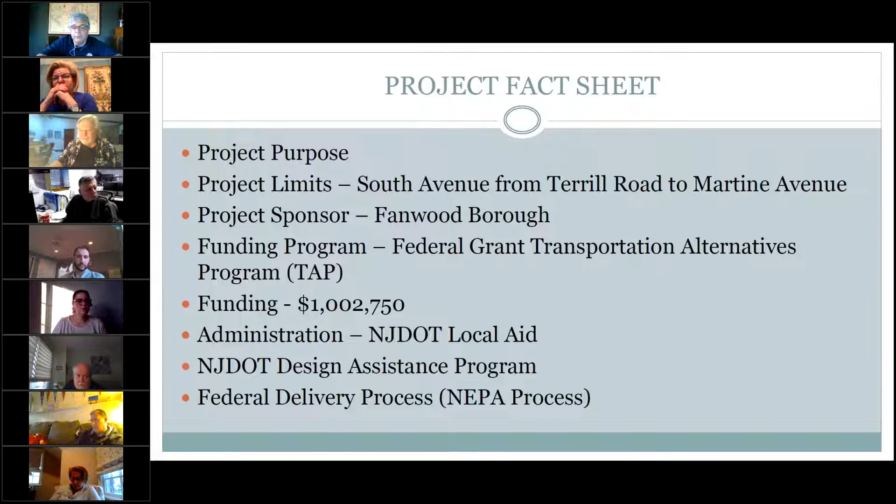Since it's a federally funded project, we have to follow what they call the NEPA process, a process developed by the federal government to ensure environmental stewardship, that the project meets the requirements, and has proper outreach to obtain input from the local community and stakeholders. So that's a little bit of an overview.

Basically, the project will have three phases of work. One is preliminary engineering, which is what we're in now. Under this phase, we'll get our preliminary layouts or design, get all our environmental clearances needed for the federal grant, and then come up with a preferred alternative to be advanced to final design. Under final design, we will get all of our right-of-way clearances, bid documents, and any other approvals needed, and have it prepared and ready for bidding for construction.

The third phase is the construction phase, at which time the project will be out to bid, a contractor will be selected, and there'll be an engineer on site during construction. So those are the three phases. As mentioned, the project goals and objectives are the installation of sidewalks and improved accessibility for pedestrians along South Avenue. The borough put in for a very competitive grant application, and was successful in receiving these federal funds.

In addition to the pedestrians, there is a streetscape component to this project. Under preliminary engineering, one of the things we want to get out there is some of the designs, themes, and visuals to aid the public in getting a sense of what the project is going to look like. So we'll be going over that as well.

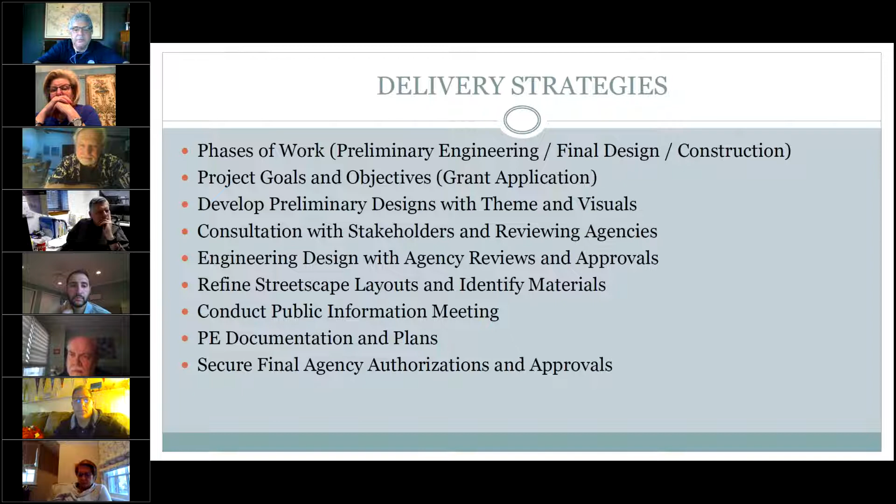At the conclusion of this preliminary engineering phase, we are going to be preparing our preliminary documentation, which are plans and estimates, as well as some reports required by the NJDOT to close out this phase of the project. Then we'll get authorization for the next phase of design, which is final design. So that's the next step, securing agency authorizations and approvals. That's kind of where we're at right now.

We're doing community and stakeholder outreach. Some of the stakeholders are boards and commissions at the borough, the DPW, police. We go out and look to procure input from all these officials, local and township officials, to obtain their input in this phase of the project, because by the time we go to final design, we really want to have a lot of those obstacles worked out. We'll also receive input from any nonprofits or interest groups.

Some of that information was provided to us, and mailers went out to the local historical groups, other historical groups, as well as the business community. Stakeholders also include government agencies - Union County has jurisdiction over Martine and Terrill Road, so they'll be involved in the review of this project, as well as the NJDOT. We've already had some discussions, as well as with private entities and the general public. There have been some discussions with property owners related to this project. We want to make sure we don't get too far down the road and have these issues creep up later.

So what have we learned? Based on our discussions with officials and stakeholders, we want the streetscaping to be low maintenance and complement the existing borough streetscaping standards currently present at the existing redevelopment area down by Martine. So we want a consistent theme, for many reasons. That's one of the things we learned.

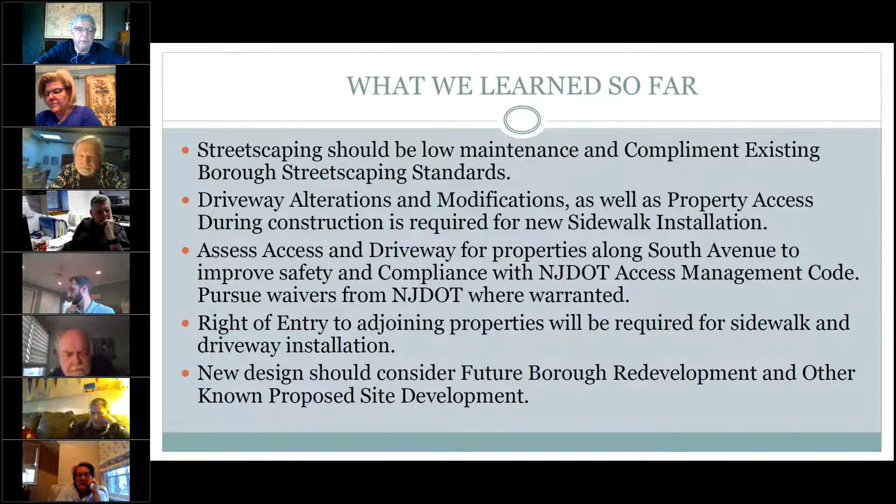So this is basically what we've learned so far. I'll walk you quickly through the improvements here. We're going to be replacing existing and constructing new sidewalk and driveway aprons basically along the extent of the project.

We're going to realign Old South Avenue and improve access onto South Avenue. Right now Old South Avenue comes in at a pretty significant skew, and I'll go through that when I walk through the plans.

Where required, we're going to restore pavement on adjoining property owners' properties fronting the driveways. Any alterations necessary to complement the sidewalk, which may include alterations to some adjacent property grass or pavement, will be included so everything matches up. That's included in the project, along with replacing existing curb where needed for some of the driveway improvements.

We'll install new traffic stripes on some of the approach roadways and may need to replace some striping there. We're not looking to touch the existing roadway pavement—we're not here to mill, pave, or do any pavement restorations to Route 28. That's beyond the scope of this project; it's strictly related to the sidewalk. If there are impacts, and it's an absolute necessity, then we will address it.

We'll also put in new ADA compliant ramps at all the intersecting side roads to make sure they meet ADA standards. Most of the ramps out there were recently replaced, and I think a majority are compliant, but those that aren't, we will be replacing.

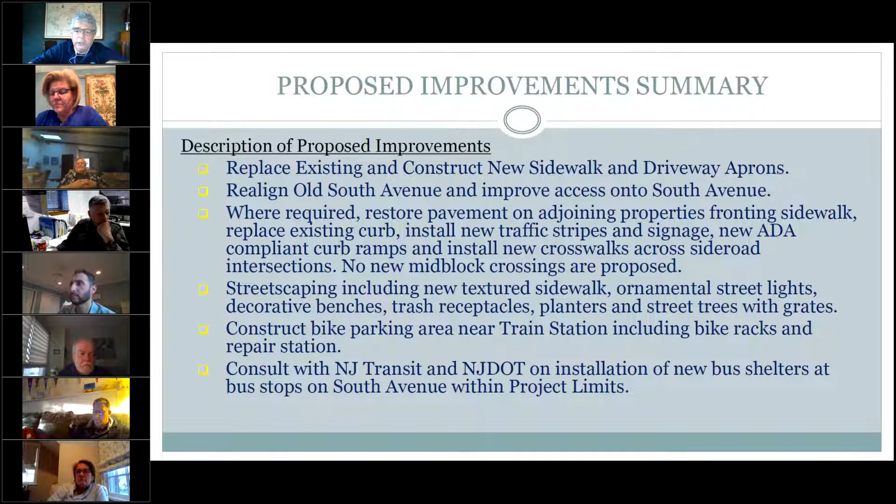We're also going to consult with NJDOT about the installation of bus shelters in certain areas and locations. That'll be coordinated as the project moves forward. We've identified the locations, but we haven't confirmed whether we're going to put shelters there yet.

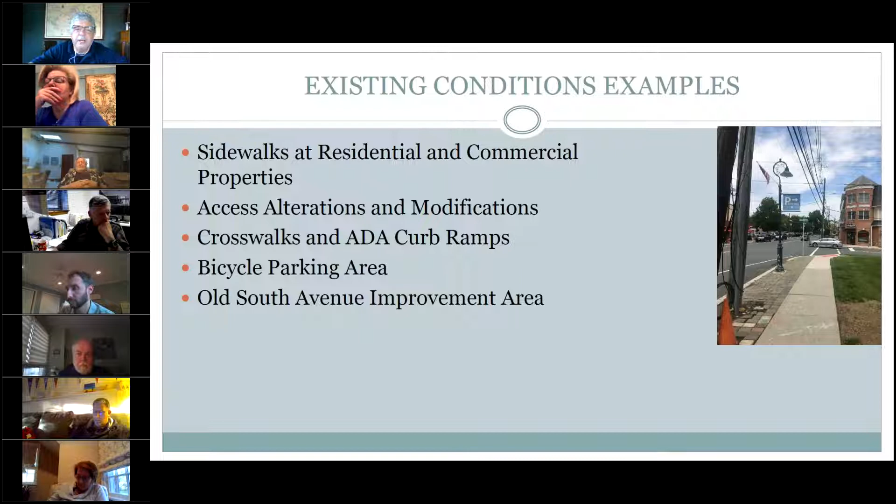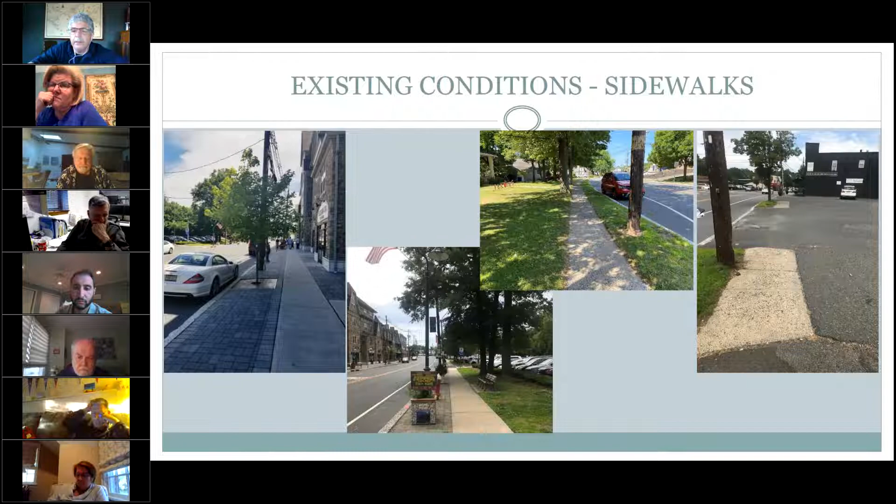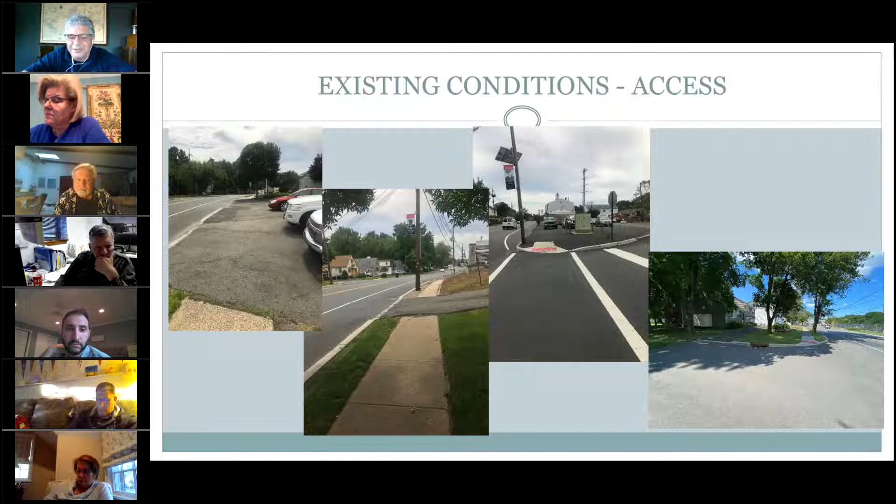This is an example on the right of an existing road opening that doesn't go anywhere. We're looking to close this off because if there's no road or street, it's confusing and not very safe. People may turn in here and there's woods right as soon as you turn into the side street, so there's no connection there, but we'll go through that in a minute.

Again, just some general photos of this disjointed sidewalk, and also on Old South Avenue, which is the photo all the way to the right. We're going to reconfigure Old South Avenue to make it safer and more direct.

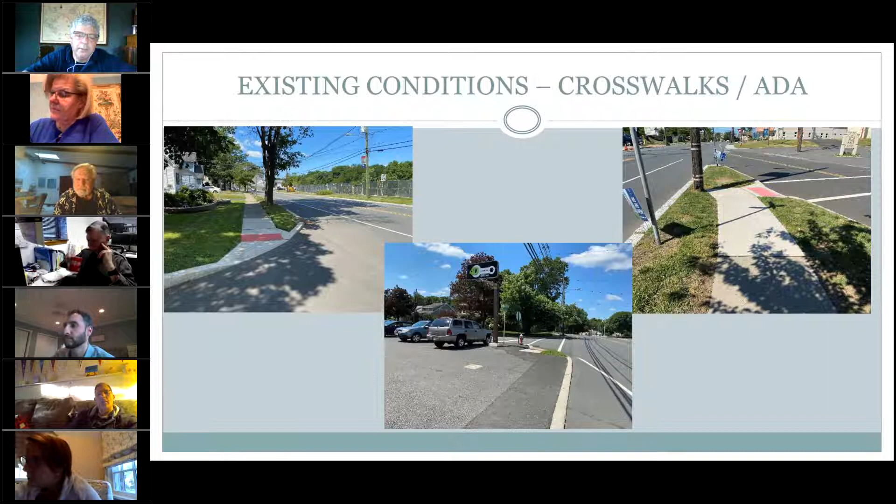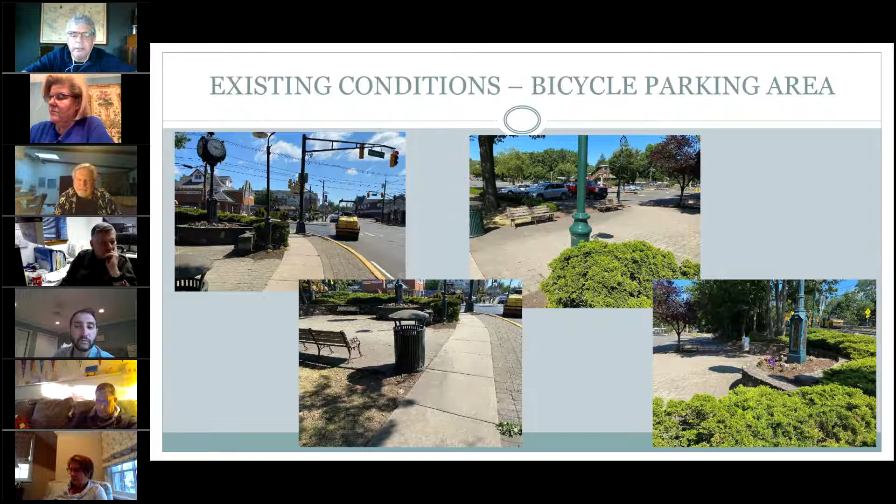It's not the safest. There's also some parking areas where the properties back out onto State Highway, and they're actually within the state's right of way. When we met with the Access Bureau, they said that's an illegal parking stall, so they've asked us to see if there's an opportunity to clean that up. So I'll get into that a little bit.

And then you have another weird situation over here all the way to the right where you have this very severe intersection into the state highway, and then you have an access, and it's just not a clean look and it's not a clean operation. So we're also going to look at cleaning that up as well. And there's a lot of conflicts, and you're trying to put pedestrians in there. It's just not a safe condition.

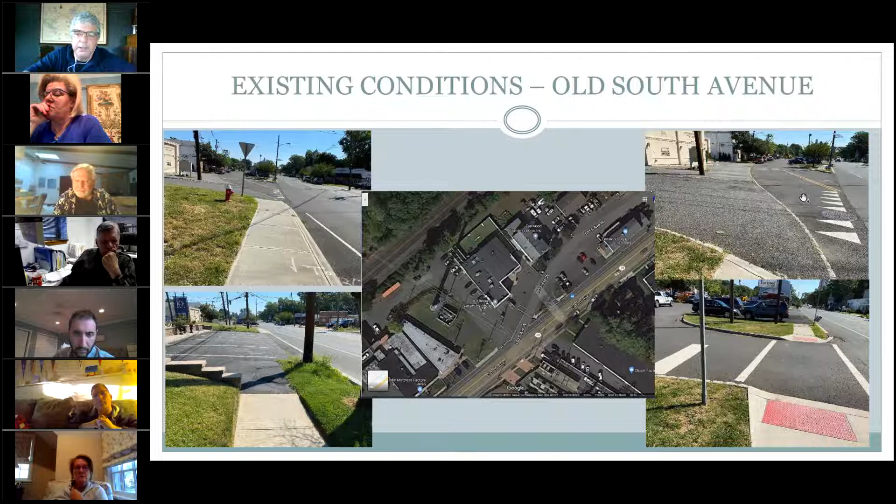In general, as it relates to the property access, we essentially, for all intents and purposes, we're looking to maintain the existing driveways. In some instances, we had to define the driveway openings because they're wide open along a state highway, and you don't want that free open condition on a state highway. You want to try to channel people entering and out of properties, not only for safety from the vehicles, but also for promoting pedestrian traffic, to have a safe condition for pedestrians to walk. So we'll kind of get into that.

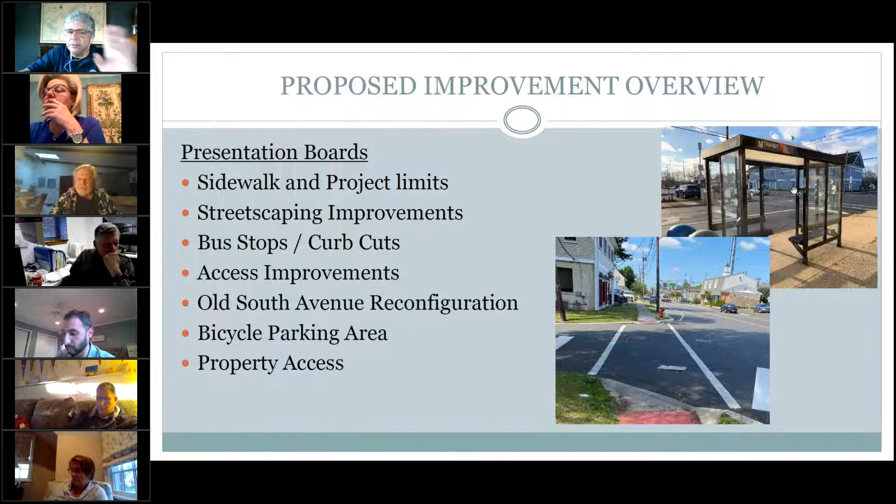So I'm going to jump over to some of the presentation boards. If they start freaking out a little bit, they do eventually fix themselves. And here we go. So I found if I jump back and forth between them, eventually they stop doing this, but we'll see. Just give me a minute here while this kind of cleans itself up.

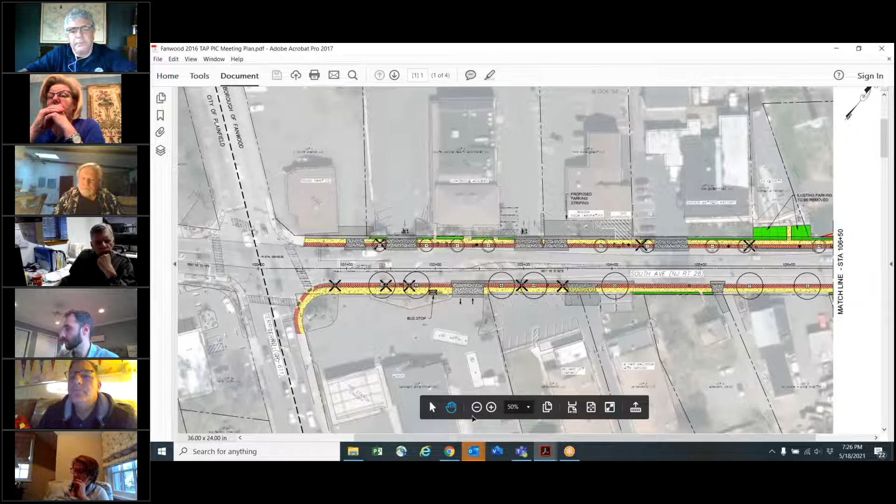Go ahead, Mike. Okay, thank you. Thank you, Nicole. Thanks for the update.

So basically what you're going to see on this plan here and what I've demonstrated, there's a little legend down here, where we're proposing our trash receptacles, proposed street trees with grates, existing trees. Like I said, we are removing some trees because they're interfering with the sidewalk or interfering with our ability to widen the sidewalk, and those are shown on here. We're showing the location of proposed planters, proposed bus shelters, benches, proposed luminaires as well.

Now the limits of the luminaire are still up in the air right now. They're very expensive, and we're trying to keep in line with the budget that the borough has. So we may have to scale back some of the luminaires as we move forward here. So I want to kind of point that out.

Existing curb ramps to be reconstructed. So like I said, the curb ramps being the ADA ramps, some of them are substandard, so we'll be replacing those, and there's a symbol. We are replacing some curbs, like I said, either to help define driveway openings better, or to replace some, you know, as part of the aprons, the new aprons we're putting in.

And then we are doing some asphalt driveway restoration. So I'll kind of go through that with you in a little bit. I'll show you an example so you can get a general visual. The yellow areas are new concrete, and the red areas are stamped concrete. So basically they're going to be a narrow strip that runs between the sidewalk and the edge of pavement. And we're using this staggered brick look, and they're going to run in the direction of the sidewalk. So visually, it's going to be a linear look.

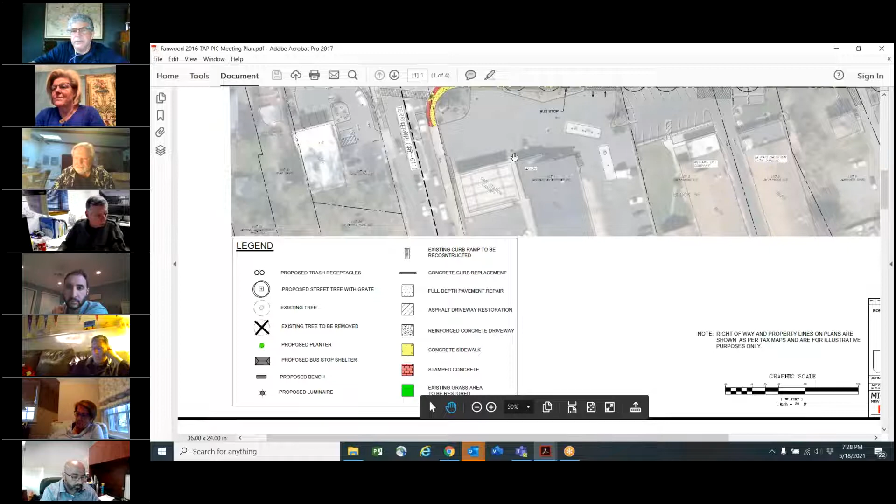And then some areas, we're doing some restorations of grass areas just to get the sidewalks in. As you can see here, this cross-hatched area is an area where we'll have to go in and replace or saw cut and put in new pavement to get the matching and the transitions between the driveway and the property. So you'll see them as we move throughout. And in some instances, we had to do it to get some better circulation in a particular driveway or property.

So again, like Nicole said, if you have questions on a specific location, I can jump back and forth between the two.

So as you can see here, driving down from Terrell Avenue, we're putting some street trees over here at the Exxon. NJDOT had asked us to eliminate this driveway opening at the Exxon because from an operational standpoint, you don't want conflicting movements here. They prefer, in this instance, that we just have the egress and ingress further onto the property. So that's what they're proposing to do here, as well as add a bus shelter at this location.

Again, we're going with a sidewalk, a 5-foot wide sidewalk with a 3-foot paver buffer in front of the commercial areas. This is the location in front of the K9 Resort where the DOT had issue with the parking situation, because having people back up in and out onto a state highway does not meet the access management code. So we're going to put in a new sidewalk here and close and grass this area of the project.

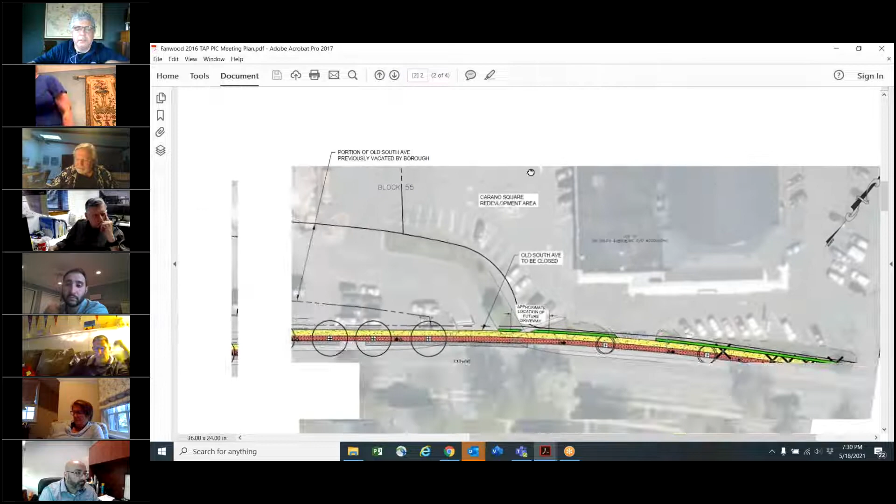So this is the old South Avenue area. What we're looking at and considering doing: the existing roadway comes in at a really weird skew, so we want to realign Old South Avenue so it becomes more of a 90-degree angle, and then the borough would vacate this portion of Old South Avenue, and provide and maintain the access that currently goes back to the rear of these properties. So now they'll have their own driveway, and the opening for the roadway has no conflict between that movement.

There would be some new drainage needed here, and we would put in a grass strip and the driveway definition island here. The area in front of the liquor store would be grassed, and then the parking stalls with access from Old South Avenue is what we're proposing to do at this location.

Again, you can see the driveways. For all intents and purposes, we're really kind of maintaining the existing driveways. Some areas we are making some alterations.

This location over here is all under the redevelopment area for Carano Square. So under that redevelopment, they're proposing a new driveway opening here, which will eventually be reflected on here. The redeveloper may, and probably will, as part of their redevelopment, build a portion of the sidewalk in front of their redevelopment, because it doesn't make sense otherwise—it's like the chicken and egg thing. So we're kind of going to work that out. But Old South Avenue is going to be closed off at this location as part of the redevelopment.

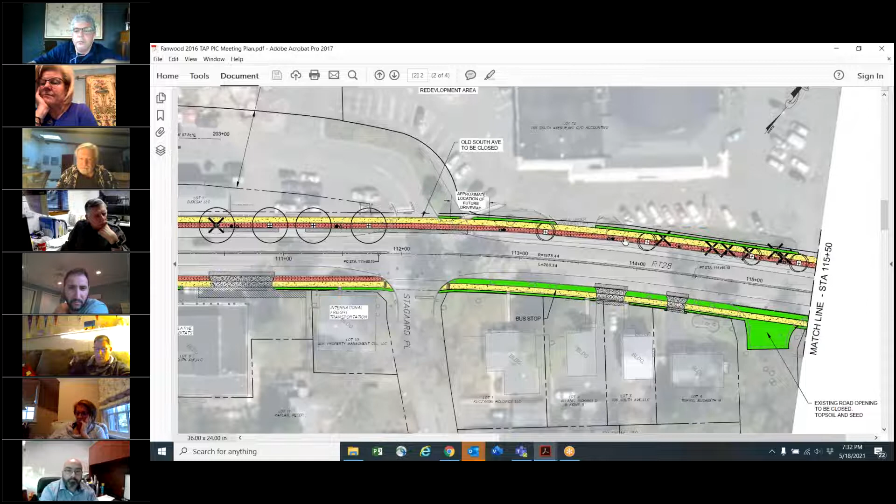Again, working our way down, we have street and ornamental lights along the route, and tree planters and trees. There's a series of trees over here that we will be removing. But when we get into these residential areas, we're going to go with your more traditional grass buffer with a 5-foot sidewalk. That's kind of the look in front of the residential homes, and where we have commercial, we're going to go with that paver strip. We're proposing to do that.

Again, these driveways have been designed so that you have proper access transition from the roadway to the driveway. So there's some minor grading alterations that need to happen here to get a good transition for vehicles entering and exiting. As part of the construction, we're going to have another meeting under final design where we'll have these designs further refined. Like I said, we're still in preliminary—we did do some preliminary engineering—but this property over here, for instance, is the Wonder Years Academy.

We're looking at having one opening because that's what the access code really calls for. Currently, there's a kind of weird come-in-and-go-out arrangement. This maneuver is doable by vehicles, and then they would exit through one driveway here. Again, some of these driveways are going back a little bit on this property because of the grade—it's a fairly steep driveway, so that'll all be engineered.

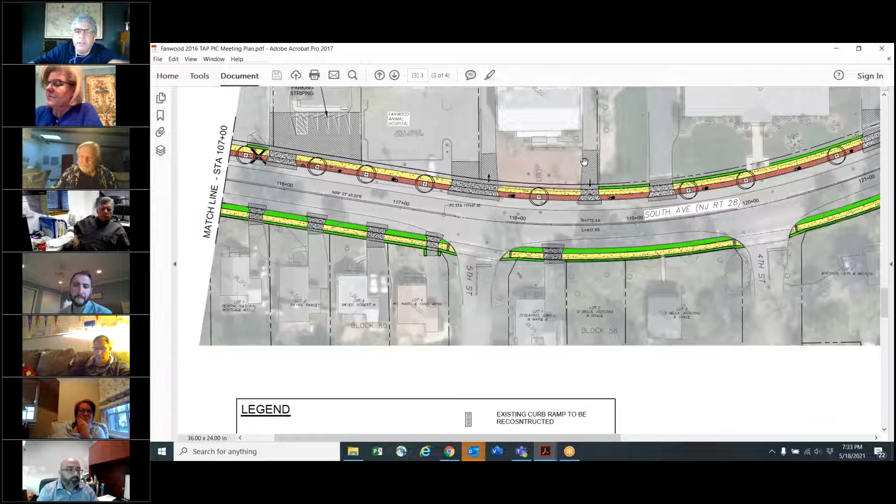Again, the consistency here on this side where we have the residential is the strip and the concrete. Working our way down, most of the driveways we're not really changing—we're just kind of matching them up with the sidewalk, so the sidewalks are going through the driveway openings.

Again, we're over here. This property, we're going to create one driveway opening for egress and ingress. This area is kind of wide open right now, so we don't really want a big wide open area that conflicts with pedestrian traffic.

This is the gas station over here, and there's a property over here. They have kind of a shared driveway. These businesses will still be maintaining that shared driveway, and the egress point is over here as well. We did look at the tanker truck movements through here, and it did work.

And again, there's another shared driveway here for this property. These parking stalls are legal because they're not within the state's right of way, so there was no issue with these parking stalls.

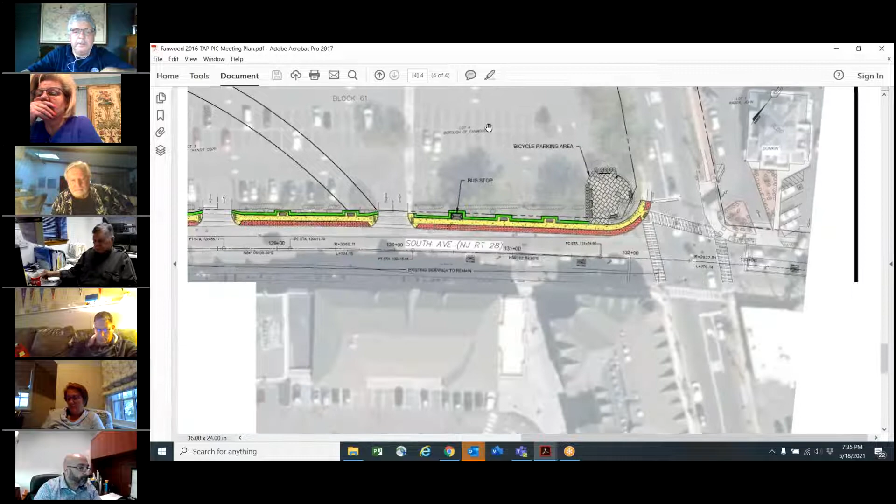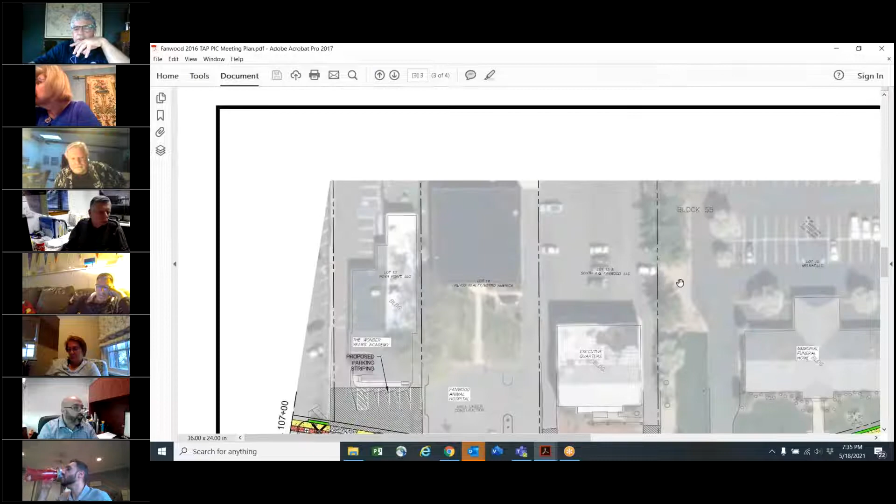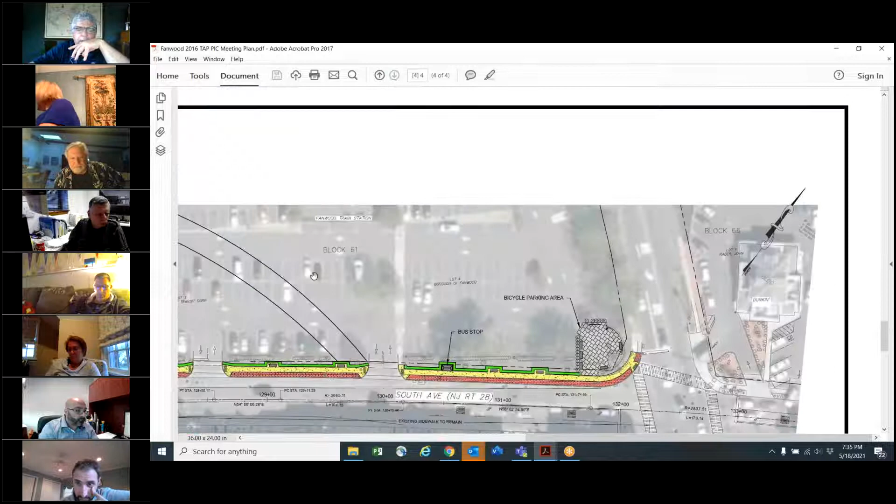Now we're getting down near the Fanwood train station here. Again, we're going to essentially maintain these driveways. I did want to point out there's a restaurant over here that has a curb cut, and I guess they created outdoor seating. I'm trying to locate that property. Maybe it wasn't the right spot. We're going to maintain that opening, although it's not an ideal situation.

Oh, here it is. We're going to close this, or we can leave the curb cut here. We're discussing that with DOT because they have outdoor seating here now, and their access goes through here. We really didn't find an agreement between the two property owners, it's probably just understood. So when we spoke with the DOT, we are going to leave a driveway opening here for the future because we can't not give access to this.

So this Fabino's Bistro, there will still be a curb cut here, but their driveway right now is a shared driveway over here. We do have to eliminate parking in this area fronting this building because, again, we don't make the rules, we're just following them. The state doesn't allow parking within the state's right of way for private use. So we're just going to be putting in white stripes here to prevent parking at those locations for now.

And then going down through the train station, we're adding some additional benches in here. They're going to be bumped out a little bit, kind of nooked into along the sidewalk to have a nice seating area. There's some trees there now, so it's actually a nice area to sit. And there'll also be a bus stop shelter placed here.

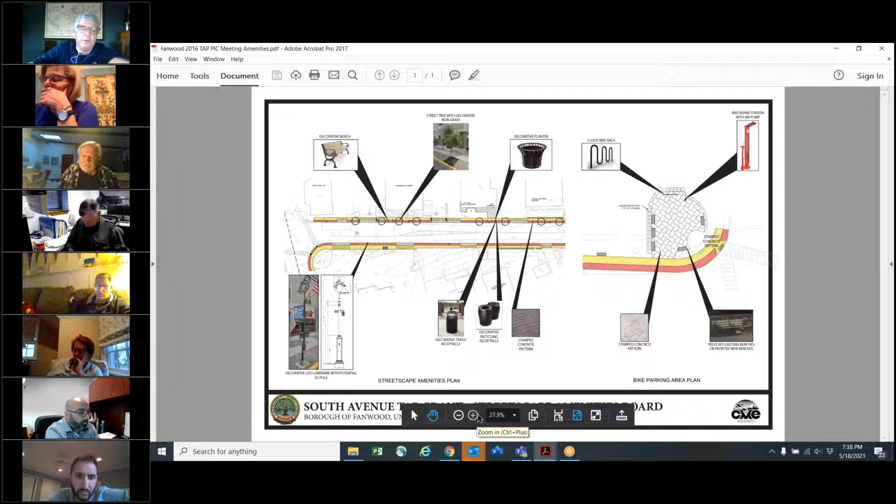But again, we're mimicking what's out there now in terms of the treatments for the benches. We're calling out very similar, this bench is ornamental, and we're taking the look that's already existing in that sitting area down near Martine. And we're also going to be putting in similar tree grates to what's currently out there in front of the new redevelopment area.

And we're going to have decorative planters strategically placed at certain locations, recycling and trash receptacles located at certain locations along the route. We're going to go with the same ornamental light fixture that's out there now, and extend them down, more than likely just to the Carano redevelopment area. Whether we extend them all the way down to Terrill is really going to come down to a cost thing.

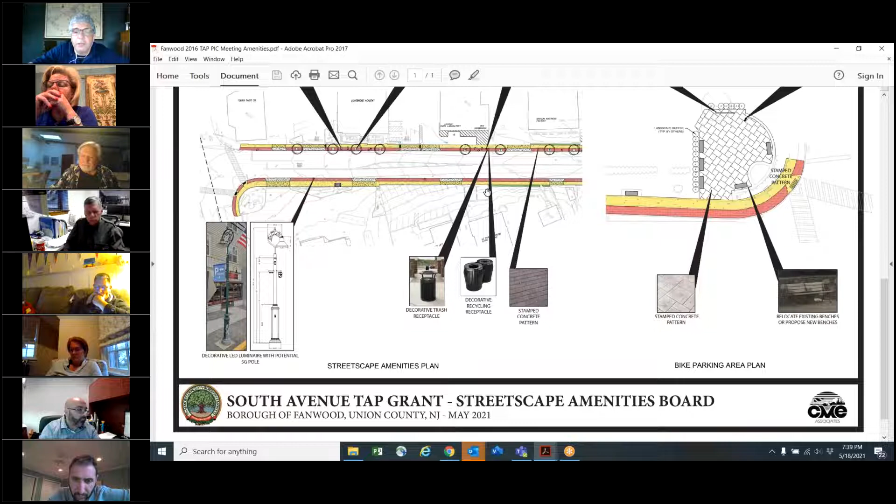But again, this is the stamped concrete, that red strip in there. You're going to have this kind of look with just a regular concrete sidewalk. In the bicycle parking area, we're going to have, currently these benches are already there. This is kind of the arrangement we're looking at.

We're going to put in this new stamped concrete surface in there. Stamping's lower maintenance. And then we're going to have a bike rack along the back side. I think the borough is looking to have some landscaping done, not under this contract, under another contract. And we're going to have this bicycle repair station, which has an air pump on it and some other equipment to repair bikes if needed. So that'll be in the back side, between Martine and South Avenue.

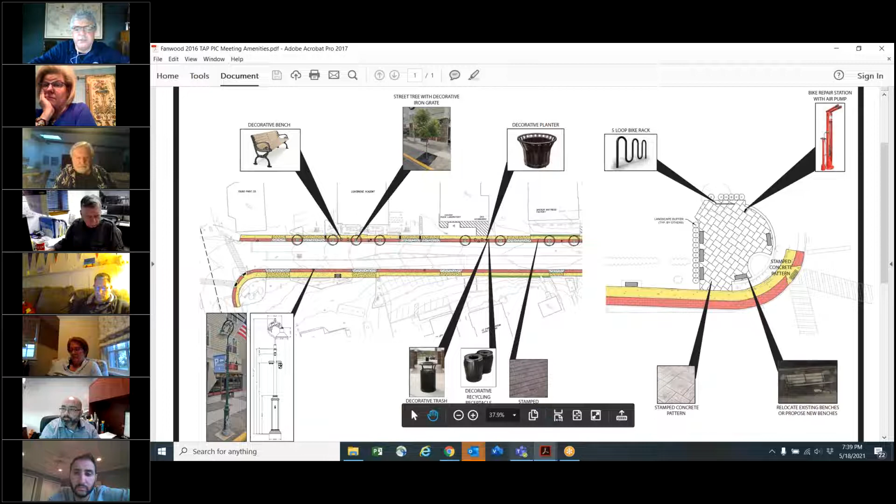So that pretty much wraps up my presentation in terms of what we're proposing to do. Let me walk through this a little bit, and then we'll open it up to questions to go through where we are with things right now.

So we've essentially gone through and done our field surveys, our environmental screenings. There's really not a lot of environmental issues out here, it's a very urban area. We're doing our PE design and reporting and estimates.

Once we get through this meeting and address stakeholders' input, we'll be finalizing our estimates. I'll be doing some additional consultation with DOT and transit, and then we'll be preparing our documentation, which are basically our plans and our estimate, and then getting our environmental document, which is required by the federal government. It's what they call a categorical exclusion document, being prepared by the NJDOT. They'll take our plans and do their environmental stewardship document, and then that'll get approved and we'll complete our PE.

So we're looking at the fall of this year to have all of that done and buttoned up. Then our goal is to start final design, because once we get through PE in the fall, it's got to go through an authorization process for the funding for the next phase. So we're looking to start final design in the spring, this time next year, hopefully sooner, and go to construction in early 2023. That's kind of our schedule right now that we're looking at for the project.

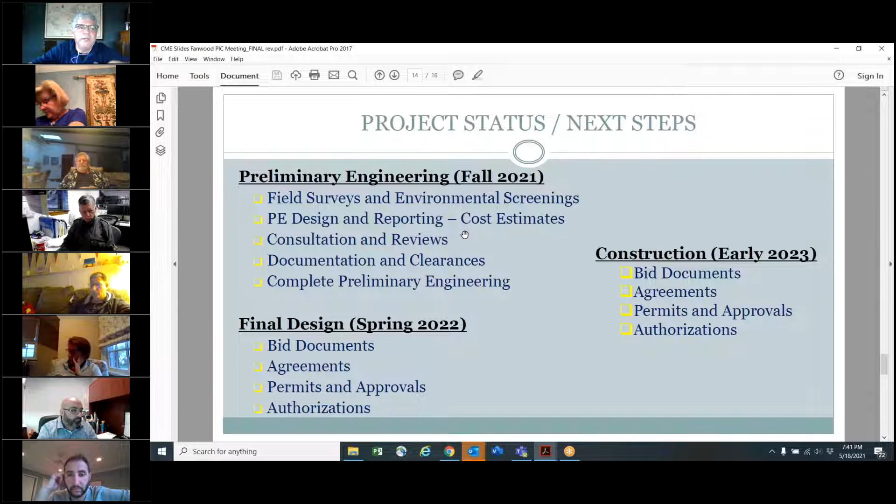So with that said, I'm going to go to my Q&A session here, and I'll hand this over to Nicole to facilitate.

No problem, no problem. Thanks, Mike.

Okay, so we did receive quite a number of comments and questions into the chat box throughout the presentation. Thank you to everyone who was asking. I think you guys are going to have some really good questions, including the questions about the landscape and architecture, as we were just talking. So I'm going to go in order that they were received. The chat box is located at the upper right-hand corner of your screen, you can see there on the screen we've got a little diagram of where it's located.

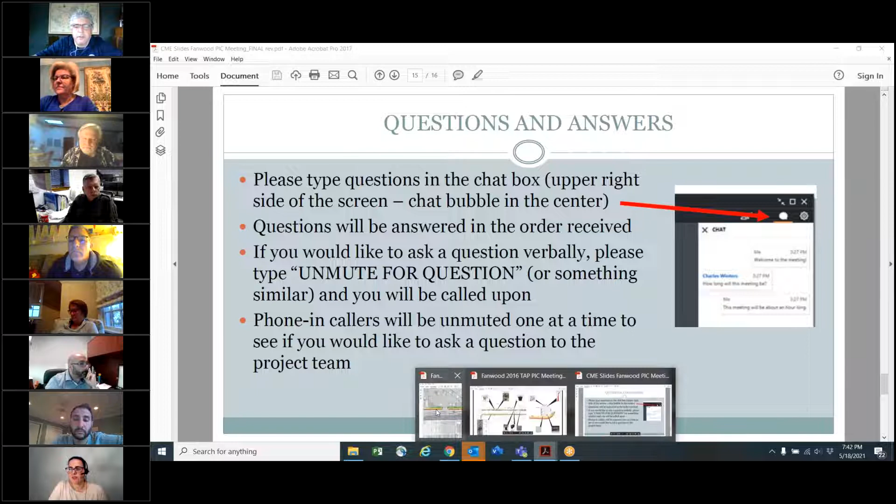Okay, let's get right into it. I'm going to start right back at the beginning and ask the first question, which was: what is the width of the project? Also, will there be any improvement to the private portion of any of the properties, or is the project only in the borough's right-of-way?

Well, the limits of the project run from Martine to Terrill Road, so that's the overall length of the project, whatever that is, half a mile or so. Now, it's actually a state highway, so the right of way is New Jersey Department of Transportation's. What's going to eventually end up having to be done here is these streetscape improvements will need a maintenance agreement between the borough and the state, and they'll come to an agreement on what elements and portions of the project will be maintained by the borough and what will be maintained by the state of New Jersey, NJDOT.

As far as impacts to private property, like I mentioned earlier, there will be the need to do some pavement restoration, some grass restoration work outside of the existing right-of-way to get a good transition between the new sidewalk edge and the adjoining property. So I hope that answered your question.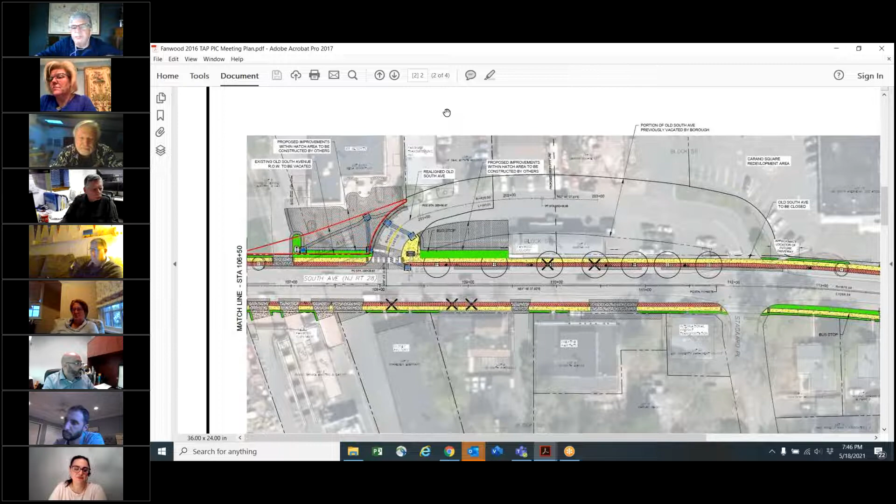Well, as part of this project, the grants themselves are very specific in terms of what we can and can't do as far as the funding's concerned. So that's a borough roadway right now, borough right of way for that particular street. I can't remember what street it is exactly. But the long story short is, at the end of the day, the borough would have to vacate it as a public road. Then from there, if they want to do something in terms of creating a pocket park, that's something the borough would have to decide. It's this road here - we're going to basically take out the pavement, put seating down, and put a sidewalk in. In the future, the borough plans to do that, but that's really up to the borough. It's not part of this project at this time.

Okay, back to the area near the liquor store. The comment in question is: while sidewalks and general beautification are important in this area, what is being done about the giant gaping hole that is the empty lot near the liquor store? Any plans there?

Again, I can't really speak beyond the project because that's our specific focus right now. As relates to the redevelopment or any work associated with that, it's really a discussion that needs to be had with borough officials. We're just basically retained to do the sidewalk and what we're designed or tasked to do. So I'm not specifically sure exactly what hole you're talking about, but I guess this means a property. So that would be a question you may want to ask the borough separately, or at a council meeting, or through a phone call.

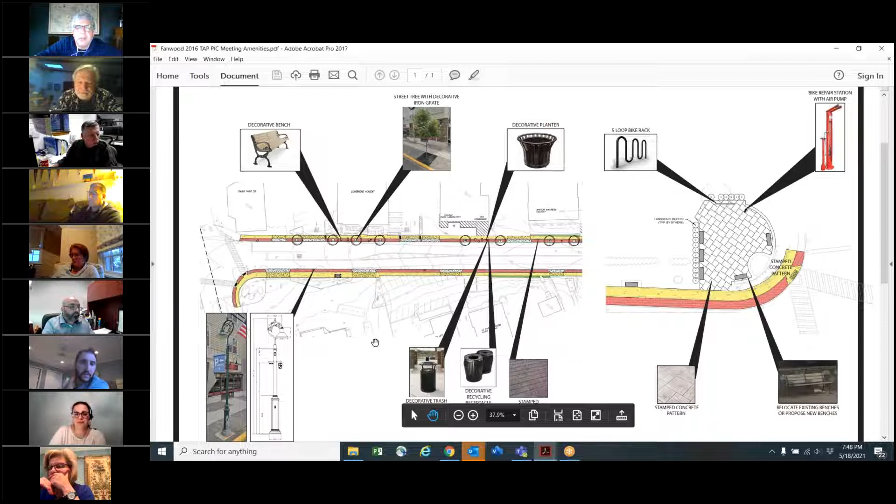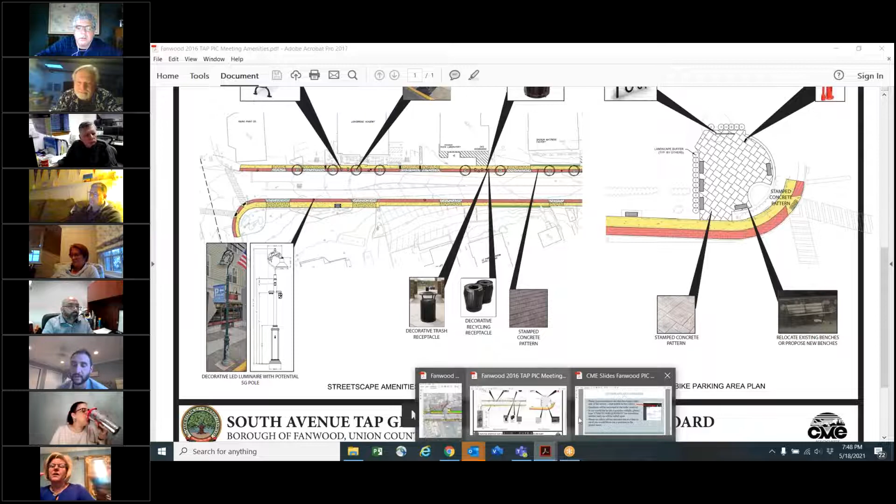Well, that's kind of a question I'm going to hand over to Dominic, our landscape architect. As far as the colors, I think the intent is to match the area of the newly redeveloped area, with those gray tones, to keep that borough standard. As far as color fading, it depends on installation and making sure you have the right installer putting in the correct sealers. With that being said, every 5 or 6 years, depending on how it actually reacts and maintains itself, there are sealers that can go on to the stamped concrete that essentially make it look brand new. As far as longevity, it will last just as long as concrete - 25 plus years.

So there are ways to give the stamped concrete a new look if it starts to fade, but they hold up pretty well. And while you may have walking on those areas, I think a lot of the walking might be on the concrete itself, where those areas up along the roadway may not be walked on as much.

Dominic, do they have warranties on these? How does that work typically with the manufacturers? Yeah, there is, I mean it depends on exactly what you're talking about. So we would have to look into that. Great, thank you guys.

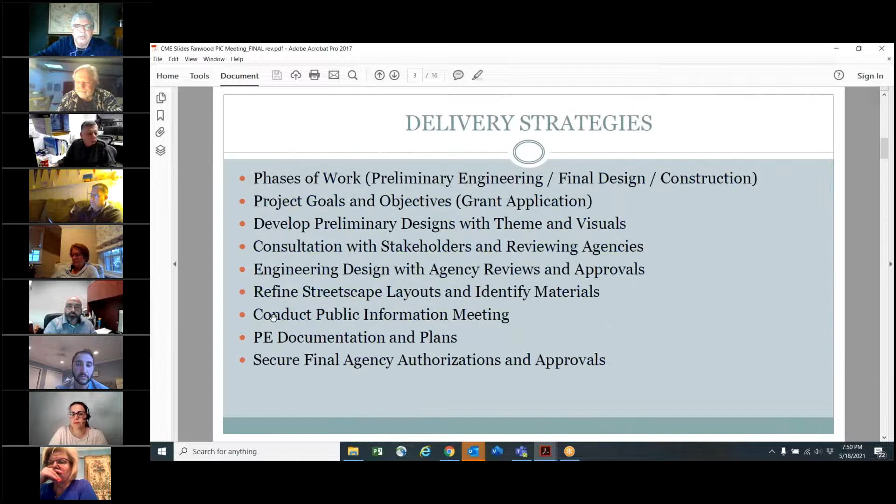That's really a land use question here. Basically, they're currently utilizing parking that's not technically on their property. In terms of that, and again, I'm not here to talk about the land use itself, if it does go into a right-of-way negotiation, if it becomes to that, that's all considered as part of the cost to cure. But again, those parking stalls technically in a way shouldn't be there because they're illegal. So it's really not a matter of creating harm, it's because they're not supposed to be there anyway. But there are some discussions that we're planning on having with some of these impacted property owners to get their thoughts and find out if there's some cure that can be done to their particular properties. But I can't speak to that right now.

But when we meet with the state, this is no different than any other state highway project - when you run into situations where parking is illegal, there's the state access management code, which is a state law. When we do this improvement, we have no other options but to follow the code. But they do have parking in the rear of their property, and they do have a shared driveway that's currently there now. So they do have access and areas of parking in the rear of their property. But again, this is an old property, it goes back probably been there for God knows how long, so it is in a way kind of grandfathered in.

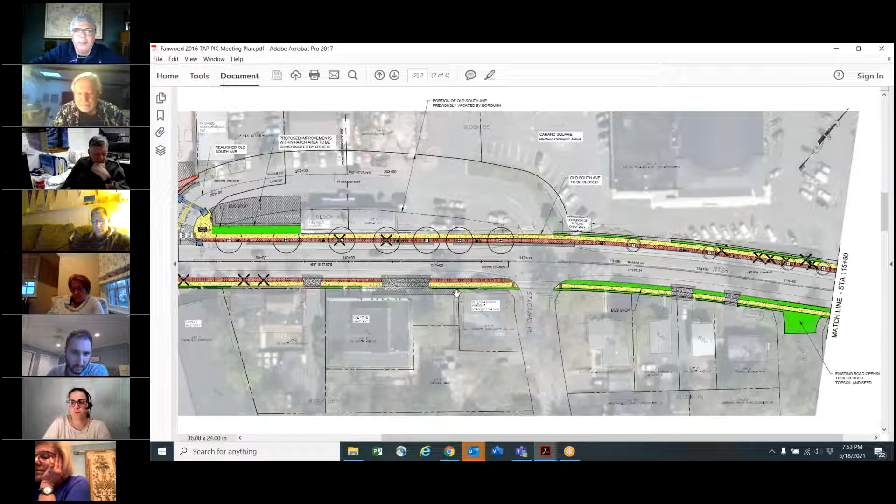Well, if there's grass now, we typically just put grass back, that's kind of what we did. So we'll just topsoil it and seed it. We're not - I know the state's not fans of using stones and rocks anywhere near the highway because it's an opportunity to get out on the roadway and chip people's windshields. But basically our game plan here is if it's grass now, it's to put grass back. I mean we are widening the sidewalk in some of these areas, so like I said, if there's a grass buffer there now, it's just basically putting it back. We usually don't do that.

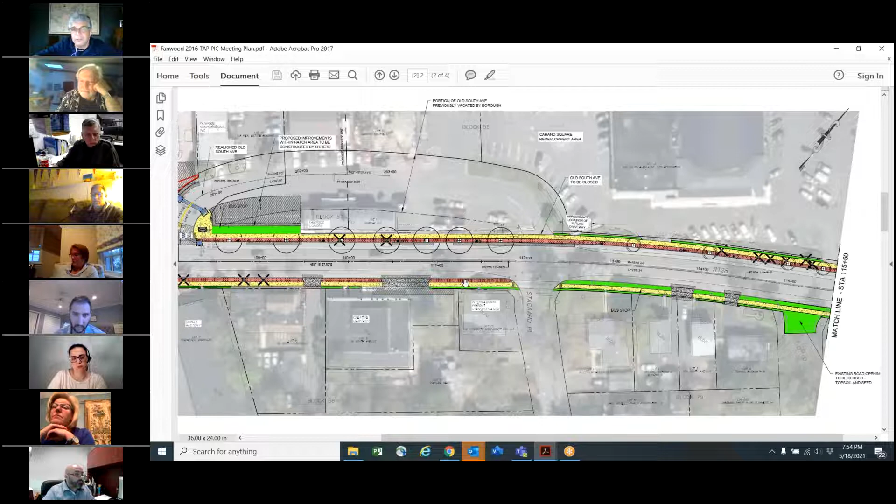Okay, the schedule - Mike, you did talk about the schedule, we're in PE and then FD and then construction. One of the questions was, how long will construction take once it's started, do you think? It's a little premature for that. In our next public meeting, in final design, that's where we get into refining the construction schedule. I really can't right now give you an exact time frame, but in all honesty this shouldn't really be a long duration construction. There's really no work in traffic areas, so it should go relatively quickly. I mean obviously when you start doing work on a normal transportation project in a travel way and you have to do lane closures and stuff like that, it kind of slows construction down.

Since we're outside the travel way of the traffic, these guys blow through this concrete relatively quickly, so I don't see it being long. But I don't want to throw a number out there now. If I had to, I'd maybe say 6 to 9 months.

Okay, great, and that'll change as the next phases go on, right? Yeah, when we get the more final design specifics, I will have a construction schedule, and we'll present it at our public meeting for final design. Okay, great, thank you.

That portion of land by the convenience store, 4D, churches, gas station, etc., is quote unquote painfully ugly. Can we add some more trees there? I think I know what you're talking about. I want to make sure that's the Delta gas station. I'm assuming this is the area here: convenience store, 4D, churches, and gas station. Oh, 4D automotive. Okay, here's 4D. I think this is the area they're referring to, by 3rd Street here.

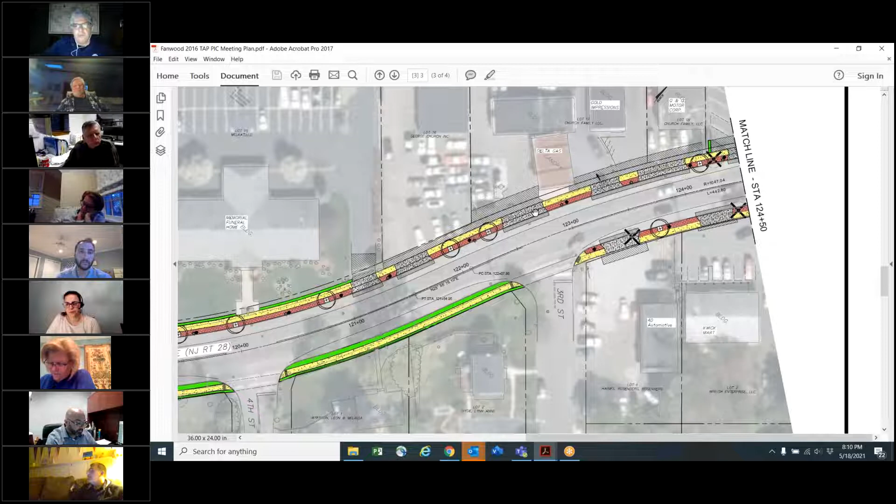But yes, I appreciate your comment, and it is something we're considering, but it just doesn't work at this particular location. Okay, thanks, Mike.

There's definitely some of these other comments that came in during our previous discussions, so I apologize for the delay. They were flowing in as we were talking and people were chatting in the box. Back to when we were talking about the crosswalks, a comment was made that crosswalks are definitely needed to get to the train from somewhere other than Martine or Terrill.

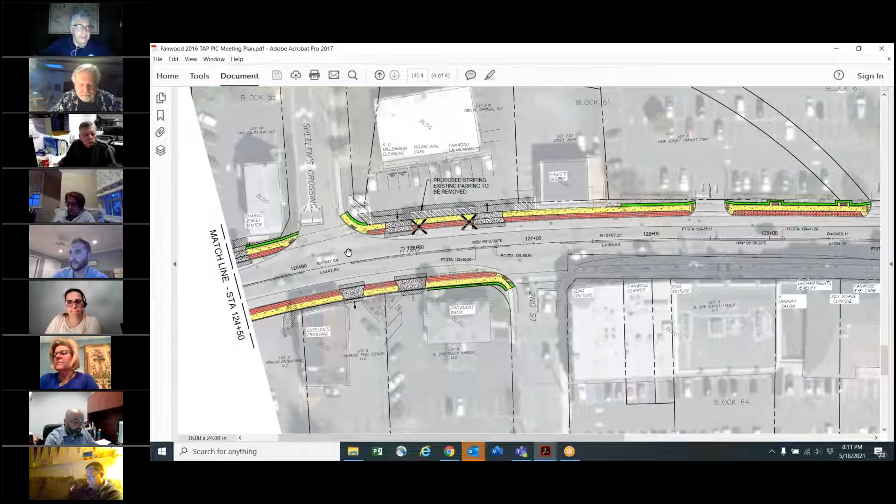Really, at the end of the day, if that's something the borough wants to pursue, they can have a discussion with the DOT. It's not part of this particular project, it wasn't included. I'm not dismissing the fact that crosswalks may be needed here, but it's a state highway, and this really involves a discussion with NJDOT. We're only here to deliver what the grant application is requesting, and that's putting sidewalks in. Whether there's justification for a crosswalk at Shelley's Crossing, there may very well be, but that's not the scope and intent of this project right now. There are other avenues the borough can pursue if they think it's necessary to petition the state for that, but that's not really the intent of this project.

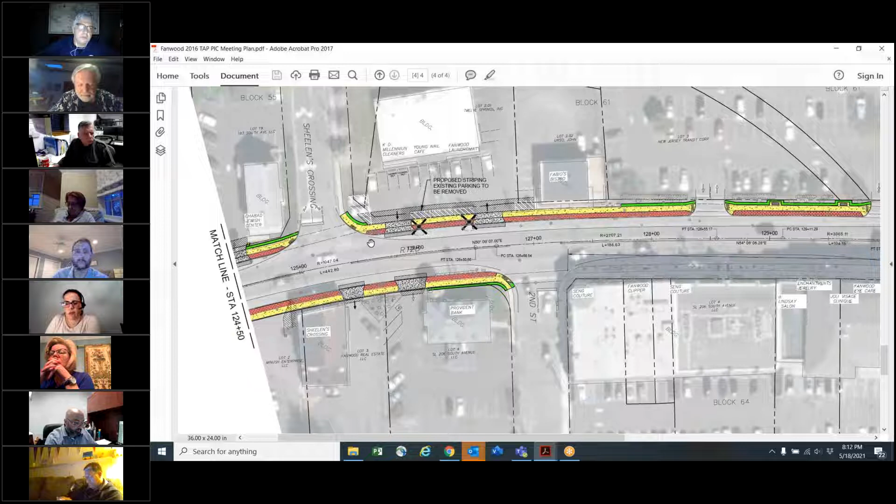And speaking of that, back to when we were discussing that piece of the area someone recommended maybe a pocket park or some seating in that particular area. Someone said, sounds like a new borough pocket park to me with that street stub. And then someone else said the borough is looking at greening it. So I guess they're already looking to address that little area.

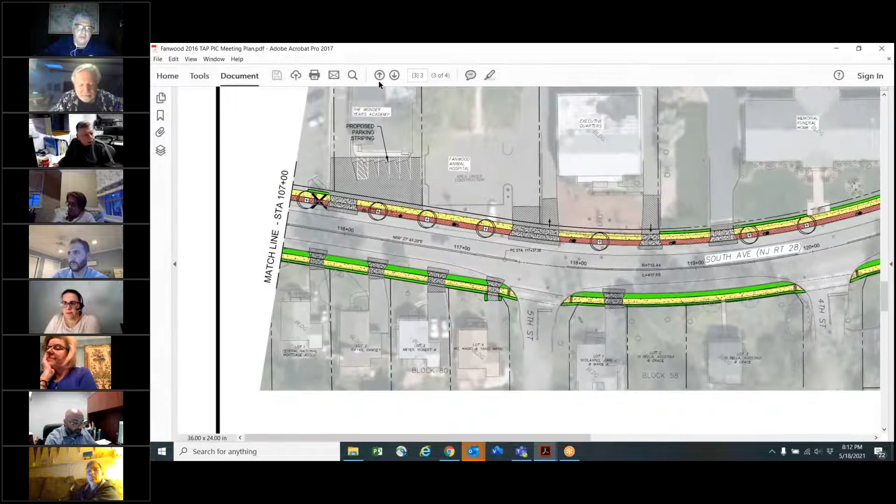So that was that. Okay. And this area right here, I could probably find it on Google, but it's really kind of not a safe condition here, because when a driver visually sees a roadway opening, they may instinctively want to turn in there, and then there's nothing but trees and leaves. So from a safety standpoint, unless the borough has future plans of cutting this roadway through, because it looks like there's a roadway on the other side, this really shouldn't exist from a safety standpoint overall.

Okay, as far as, and when we were talking before about the concrete, Dominic, one of the questions is, does that stamped concrete require sealing periodically? Depending on how it does from initial installation, it certainly can use a resealer, every 3 to 5 years depending on how it does. It's not necessarily an expensive process either, and it's not that it's structurally unsafe or anything like that. I think the initial question was more about fading.

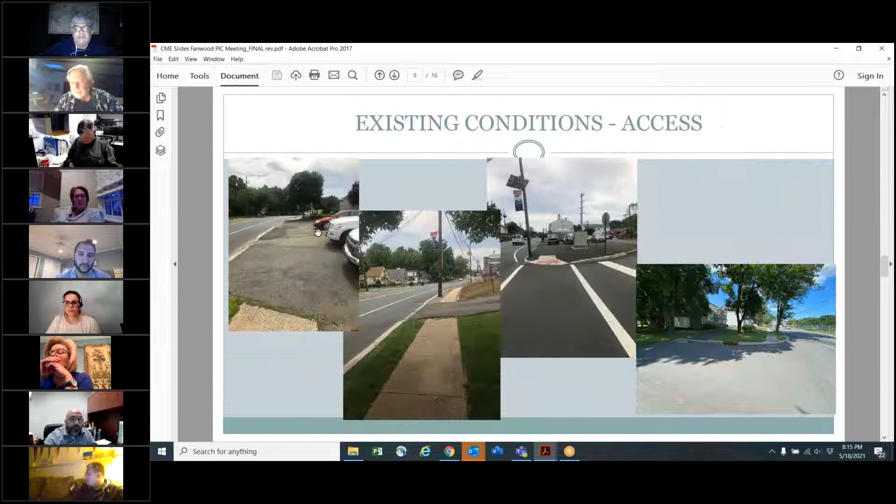And like I said, personally, we could put in a paver block, but as you're all aware, what happens with paver blocks—I'm going to go right to a slide here that's currently at the site. You can see what happens with pavers. Stamped concrete is better long term, like over here where you get this breaking up, unsettling, and disjointedness going on. The stamped concrete will keep its shape as opposed to individual paver blocks, so from a maintenance standpoint, they're better.

Okay, great. We just have a couple more questions, and then I'm going to open it up at the end because we've got about just under 15 minutes left.

So we already discussed the types of trees and how they were going to be selected, but do you plan to plant the same type of tree for a uniform look, or do you think different species could be planted for diversity?

We would typically install, depending on whether there's overhead wires or not, groupings of trees along maybe two blocks or a block, just depending on how everything lays out. But a couple of blocks of the same species, and then we would switch to another species. You never want to plant just one species.

I'm not sure if people are familiar with certain insects that come through. Everyone planted ash trees in the 80s, and now emerald ash borer has killed every ash tree from Chicago all the way to the East Coast. So those are things you want to avoid. Even with oaks now, there's oak wilt and certain issues that come and go in the tree world, so you never want to plant a monoculture. We like to plant groupings to keep uniformity, but we also switch those groupings as you go down the road.

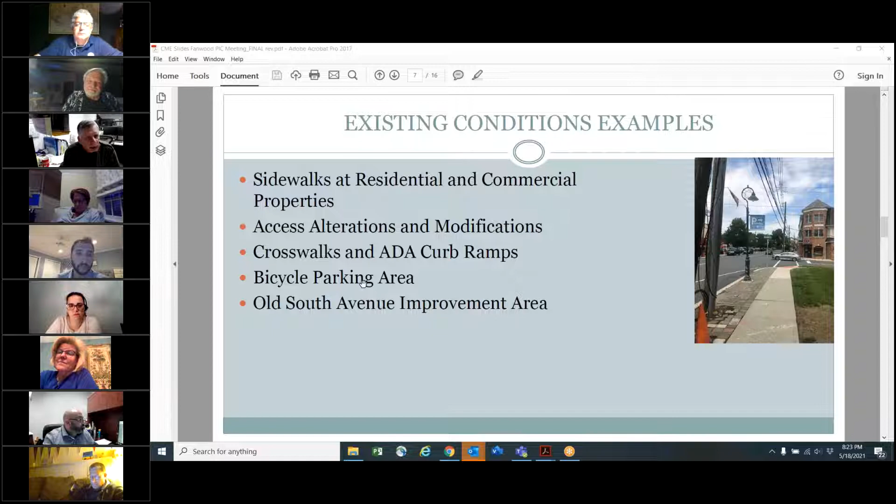Getting to that infamous little paved section, I believe that's an extension of Ashforth Court. The plans right now call for it to be topsoiled and seeded. Well, since you're already planting street trees, instead of putting grass seed down, why not just plant a couple trees there? And then the borough in the future can decide if they want to put maybe a park bench in front of something like that. But I think if you got the opportunity to get a couple trees, because as I tell people, you can plant all the trees you want, but you can't plant time.

So if we can get a couple of trees planted now, they would get a head start. Also, if any opportunity exists to group trees together, because we know in the forest, the trees are competing against one another for sunlight and such, so they do grow a little bit stronger and faster. So maybe not just single trees here and there, but there's a few places where they can be grouped. Again, we think that would be beneficial as well.

And that section of South Avenue is probably more a question for the borough. Instead of vacating that entire triangular area, again, that's another opportunity to maybe put some more green in that spot. Again, that would probably be up to the borough, but that looks like a really nice area that could use a couple trees as opposed to just a grass area, so on and so forth.

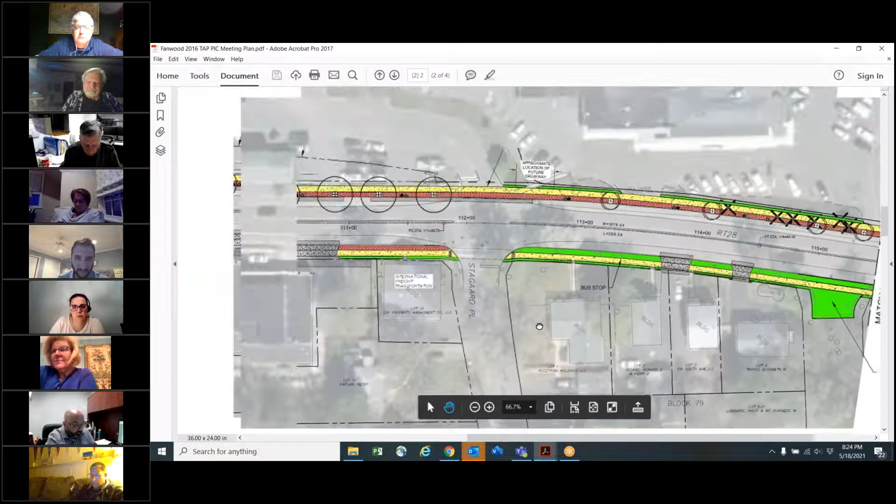And I guess on the south side, you do have the trouble with the power lines there. Too bad the scope of the project doesn't allow you to put all those power lines underground, which would be really nice. But in any case, if there's any opportunity, perhaps to plant some more trees on that south side, maybe smaller species and such, as you indicated, would be beneficial. So again, we'd like to maximize green as much as we can. Any place where you're taking up those parking places, that would be really, really great. And again, thank you for the presentation and all your work on this.

I appreciate your comments, Gary, thank you for your comment. I agree, there's maybe an opportunity in here to plant some trees in these strip areas along the old South Avenue here. So those are areas of opportunity, possibly. We'll take a look at that, Gary, for sure. And obviously, any feedback the Environmental or Shade Tree Commission wants to provide to us and our landscape people, that would be great.